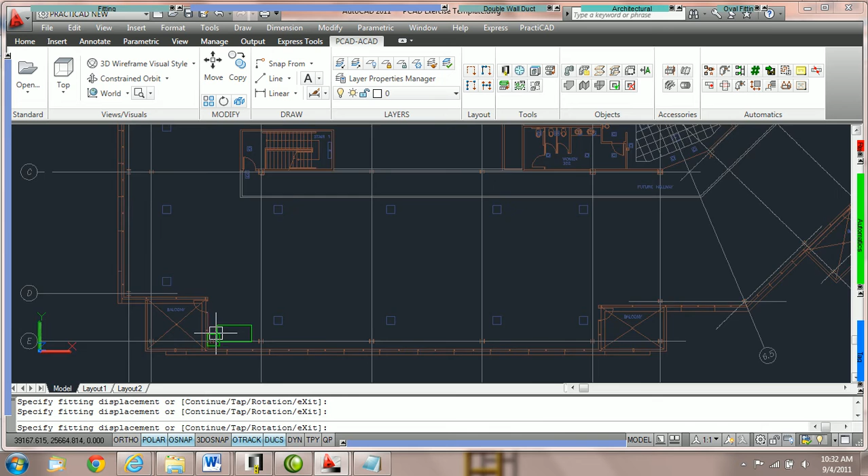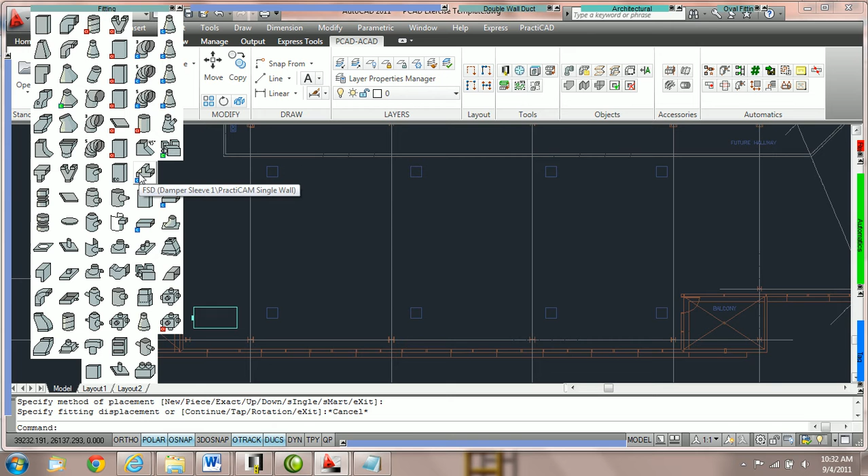Next step, let's grab a fire damper fitting and let's place it on the drawing. For this tutorial, we will pretend that there is a wall in the middle of the drawing and we're attaching it. The fire dampers you have in your bin might be different than what you see on this tutorial, so just grab any fire damper you have available. Here I'm going to grab a catalog FSD and I'm going to place it.

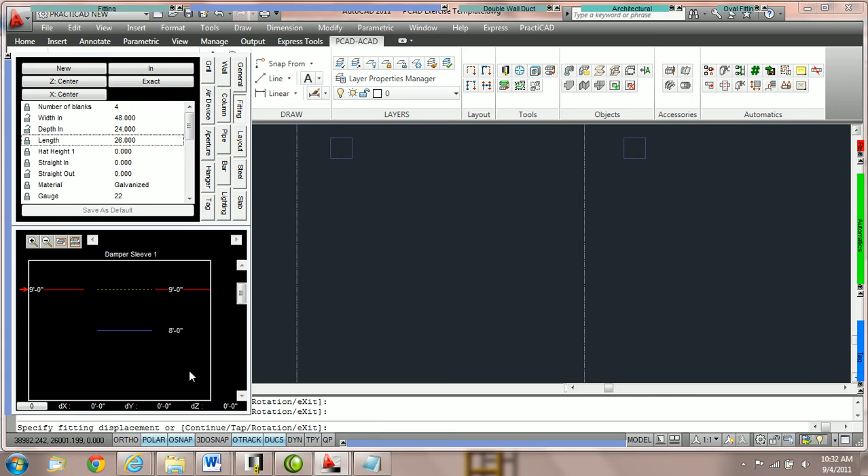Whatever fire damper you pick, go to the fitting parameter box and change the size to 48 by 24. Now I'm going to change the elevation to 8 foot, bottom at 8 foot. And then place it on your drawing in the middle of the screen, about right here.

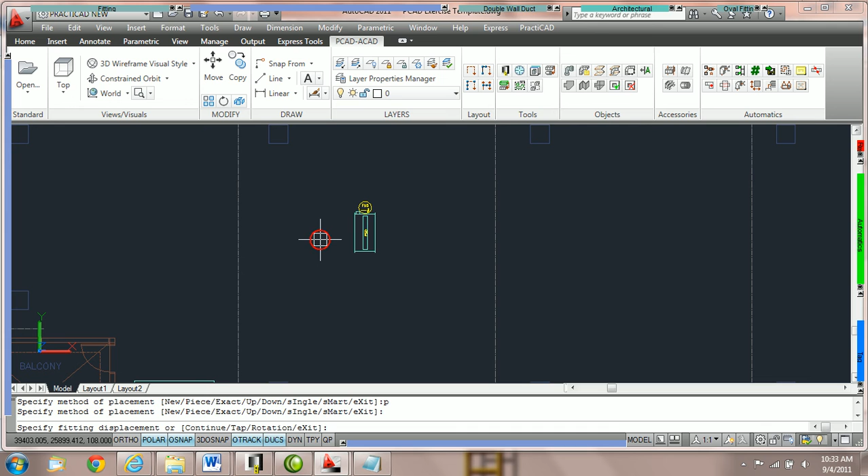Going to click once, click twice, and now I need to choose my routing method: new, piece, exact. I'm going to type in P for piece so I get just one piece. And then click again to place. Now we want to zoom into our fire damper. In earlier tutorials, we explained the concept of in and out.

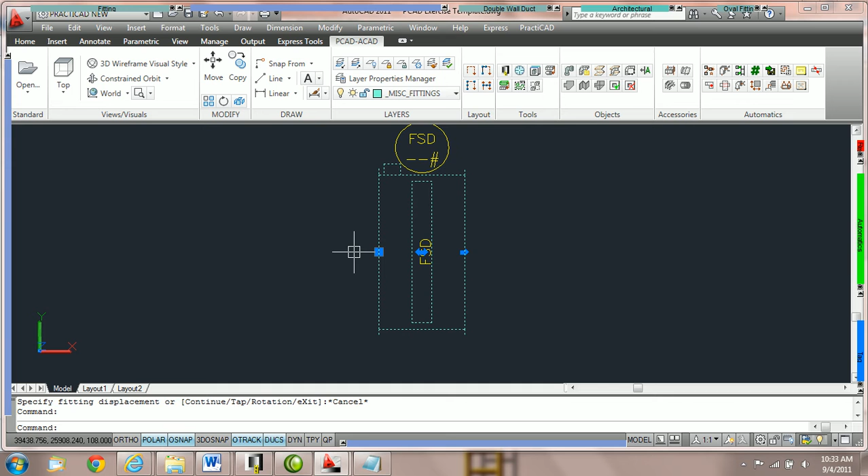If we've done this correctly so far, click on your fire damper and take note of the node that happens to be square and blue. Then go to your fitting parameter box and make sure it says the in. Generally, as a good rule, in joints should always point towards the air handling units. Out joints should always point towards the grills.

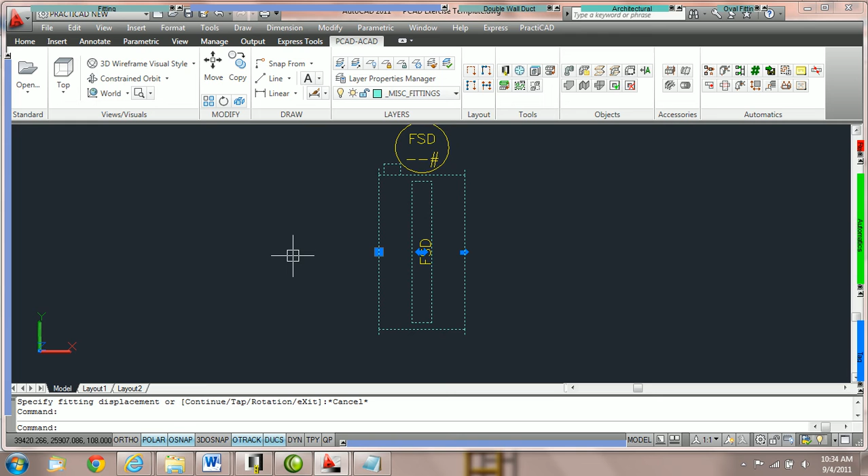Whether the duct is supply or return duct line has nothing to do with the in-out connections. In-out is just the fact that we attach the in joint of one duct to the out joint of another duct. So as a general rule, it's good to have the in joint facing the air handling unit and the out joint facing the grill.

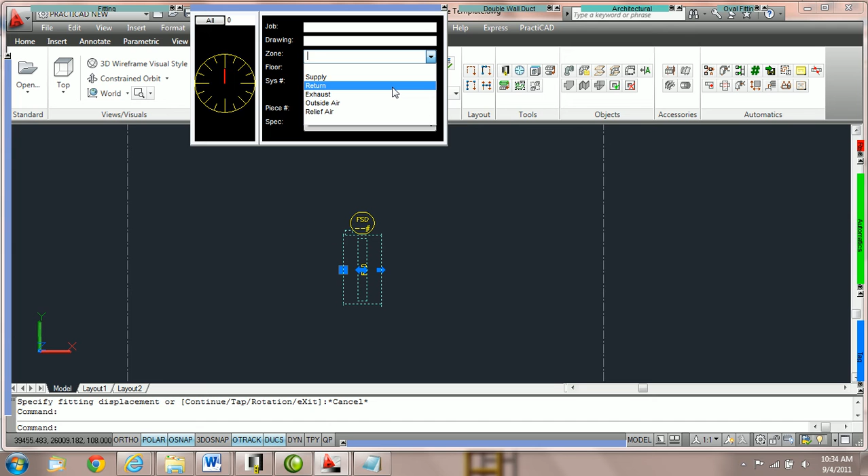If we want to switch it to return, we still draw it in to out, but we would change the zone to return. And it would report as such, and our tags would show the difference as well. However, supply and return has to do with airflow, but airflow has nothing to do with connectivity. It's a very important concept to understand.

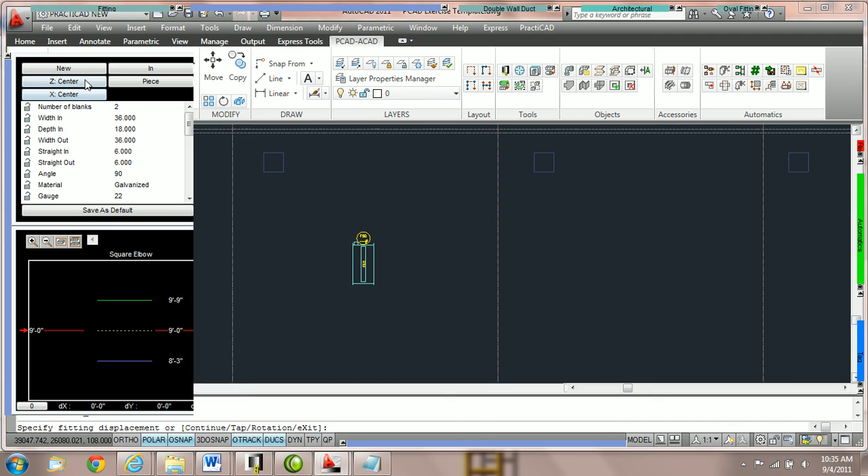We're now going to route duct using an elbow towards this grill here. Go to your fitting parameter box and select an elbow. Here we're going to choose a square elbow. I'm now going to hit C for continue. Now you will notice that because we're holding the elbow by the in, it's going to naturally snap to the out of the last piece of duct we've connected to, which will be the fire damper.

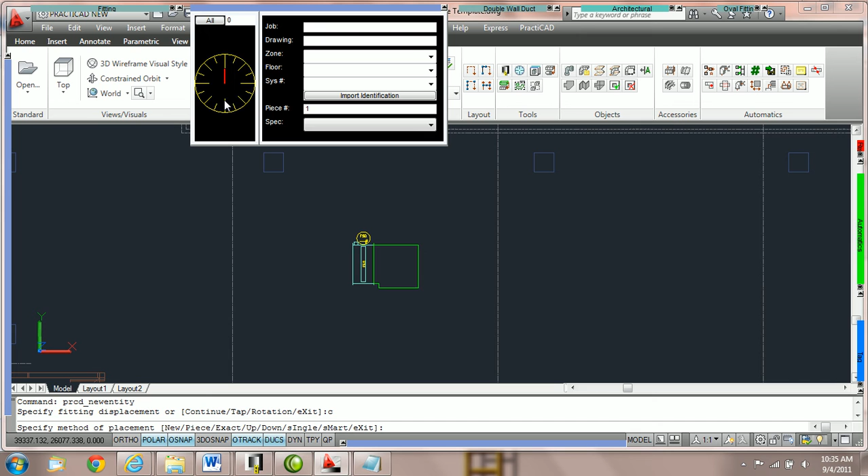I'm going to hit C for continue and spacebar. Now you can see the duct has snapped. I'm now going to go up to my direction box and we're going to switch it to the opposite side. If I want to switch it from turning right to turning left, I just go opposite of where the line is here. Then I'm going to hold my cursor somewhere in the center of this grill. And I'm going to switch the routing method.

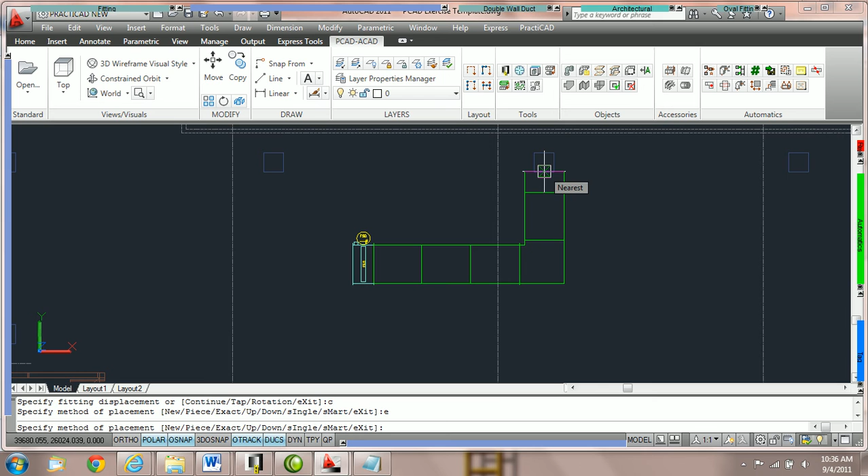In the command line, you should see new piece, exact, up, down, single, smart for the routing methods. Going to choose E spacebar for exact. Once I move my cursor, it should instantly bring the duct very close to the grill. I'm going to snap about right here. Now I'm going to hit escape to let go of the fitting, or you can right click and hit cancel. It's up to you, keyboard or mouse.

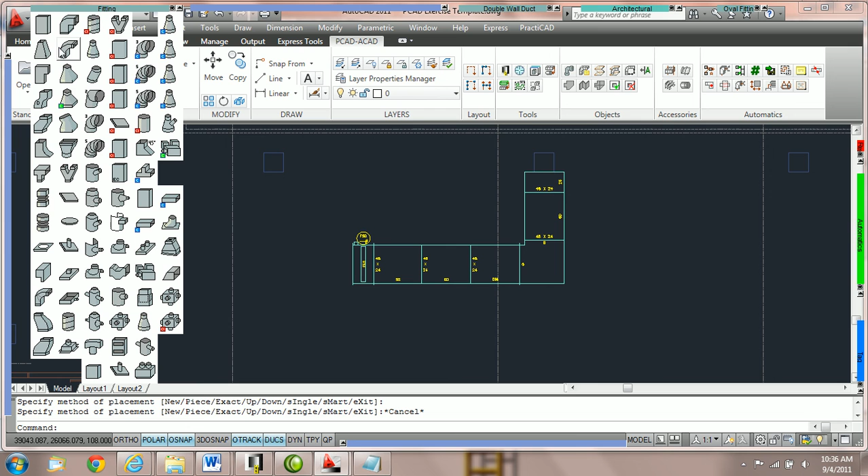Now we want to take it off of continue because we want to route from the other side of the fire damper. Here we're going to switch it to new. Now we're going to grab a different elbow, a square elbow that we're going to attach to the other side of the damper. Grab the square elbow by clicking once. Going to zoom in a little bit. We must change from holding the elbow from the in to holding the elbow from the out.

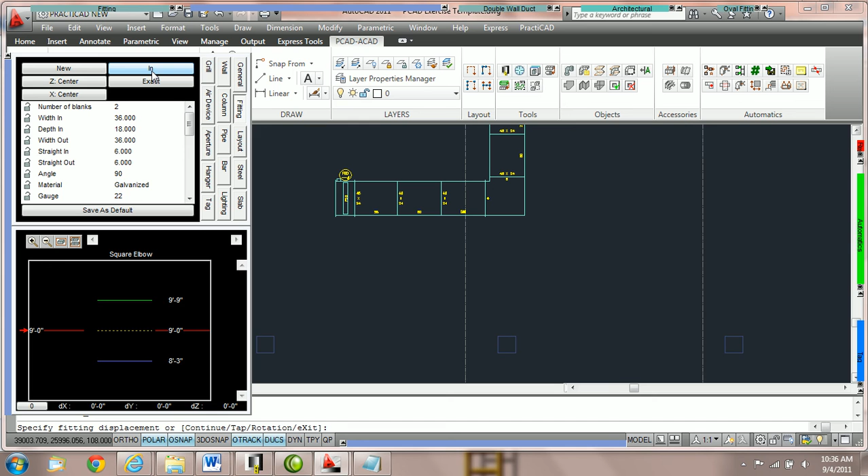This way we can bring the elbow over to the damper, as I'm doing currently. Snap the elbow to the damper. Now I'm going to click once to attach it. And once again, PractiCAD's giving me the routing methods. It's still on exact from the last time we clicked on it. So I'm going to pull my elbow down to the grill and I'm going to attach here.

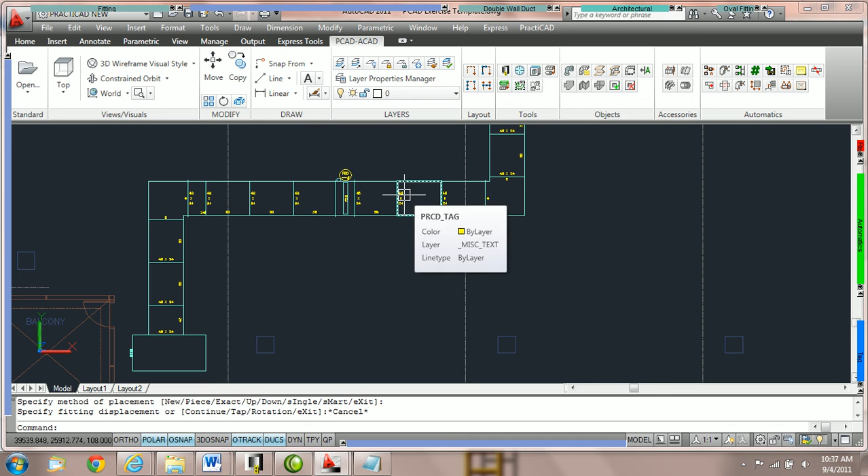I understand we're not attaching it correctly. There's other tutorials on that. This tutorial and exercise is just to get you familiar with the in-out attachments. I'm going to click here. We have now used the in-out connections properly. To make sure this is done right, let's do an edit and see if the edit carries down the duct line. I'm going to pan over to my elbow.

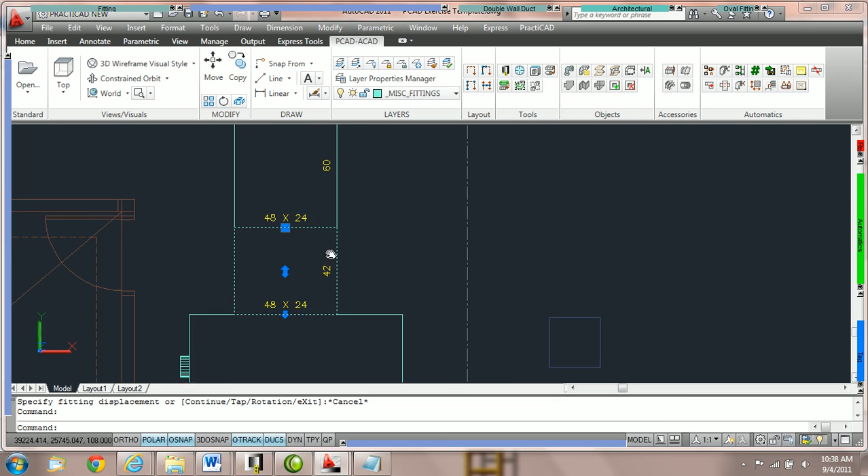Click on the elbow one time. Notice that the joint we are holding, the square node, is the out. Switch it to the in. This way we're going to edit from the in joint forward. If we do it the other way, we actually edit from the out joint backwards. There are tutorials on this in the duct line editing exercises.

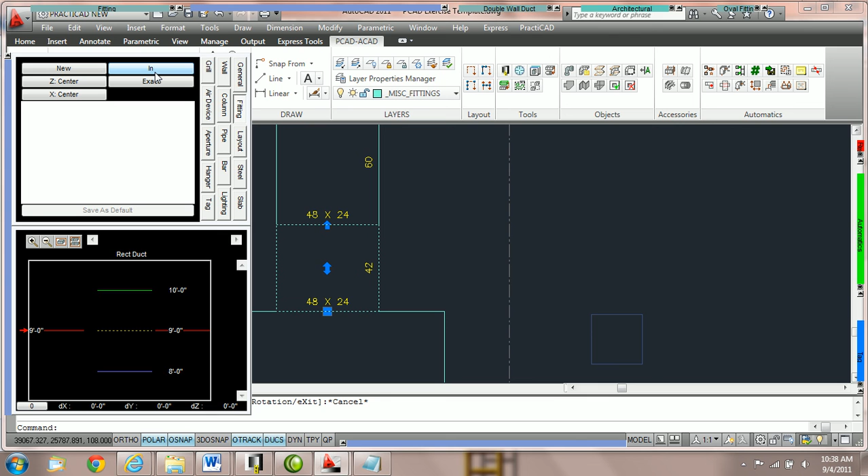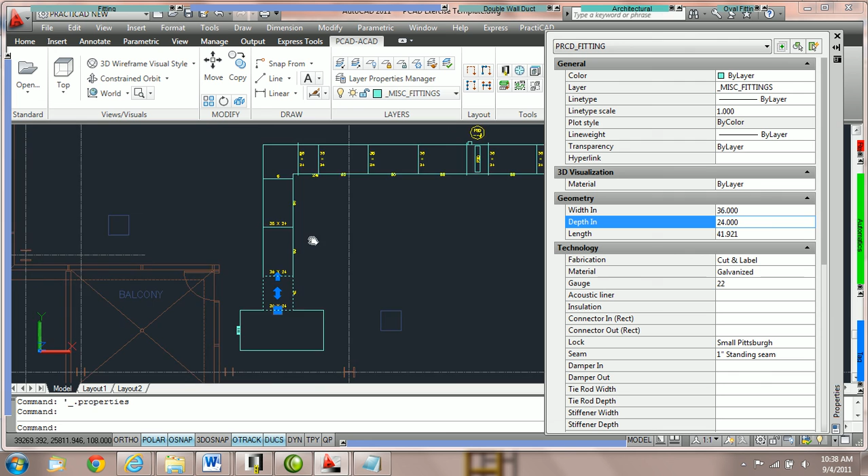Once we're holding the first piece of duct by the in joint, double click to get your AutoCAD property box. Now change the width in to 36 and hit enter. If we did this correctly and everything is attached, we should have all of the fittings on the drawing at 36 because they've edited properly.

This is a very important exercise. Go over it as many times as necessary. But this will conclude the exercise on in-out attachment.